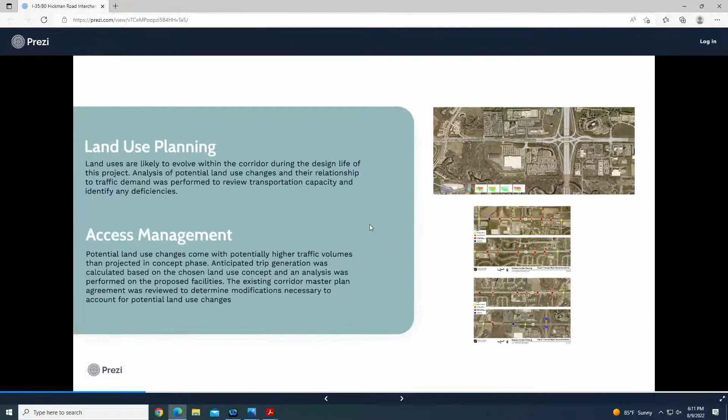Over the past 7 months, we've been working with the City of Urbandale and City of Clive staff on the corridor planning efforts that John mentioned. Those include land use planning, access management, bicycle and pedestrian accommodations, aesthetics, stormwater management, and project cost and funding strategy. I want to talk first about land use planning. Throughout the design life of this interchange, it's likely that land use could change. Early on, it was identified that the majority of the corridor is already fully built out and is not likely to have a wholesale change in land use, with the exception of the southwest quadrant, south of Hickman from 128th to the interstate.

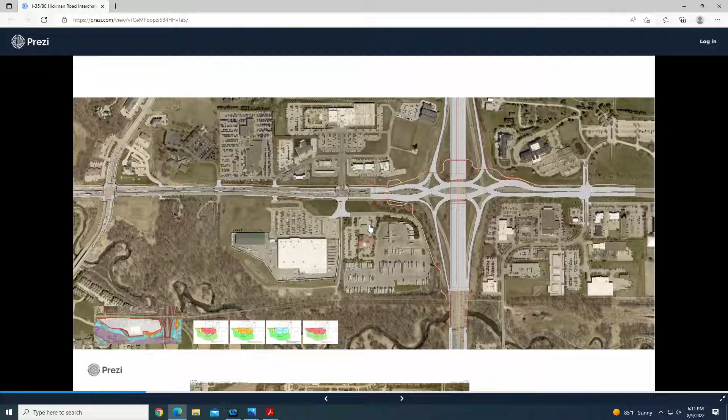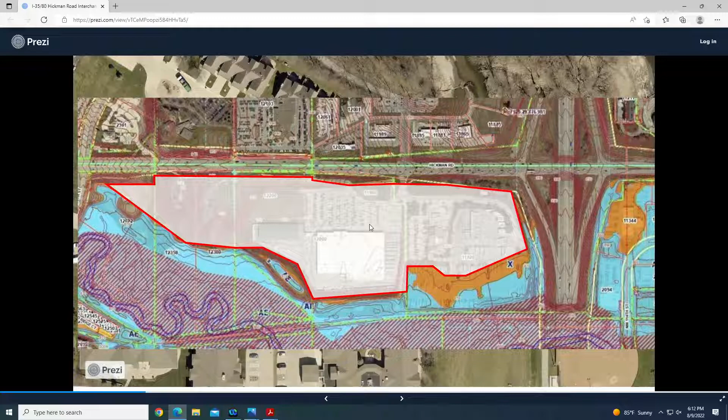If you take into account the floodplain and floodway of Walnut Creek, as well as required setbacks, this area represents 56 acres of developable area.

From that, we developed a handful of scenarios to look at redevelopment ranging from a mix of commercial and residential development.

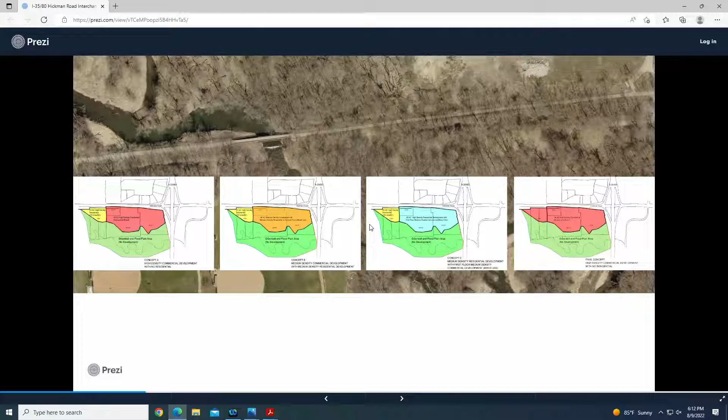Ultimately, the final concept represents the highest and best land use of the land, and that would be the entire 56 acres being redeveloped into a high-density commercial area. In the bottom left, you'll see the assumed mix of businesses that would be in that area.

To give you an idea of the traffic volume changes, currently that area generates about 6,000 vehicles per day. If this area were to redevelop, it would go to a little over 27,000 vehicles per day.

So this planning for land use changes is very important as we develop the interchange. We don't want anything designed at the interchange that would hinder further development in the corridor.

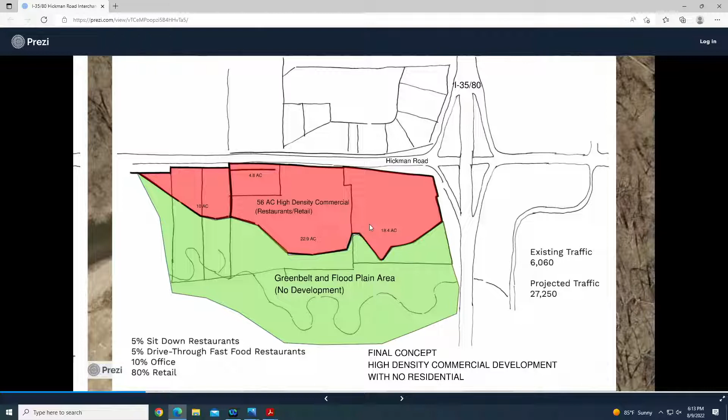City of Clive and Urbandale and the DOT have an agreement in place for access management throughout the corridor, from the interchange over to Alice's Road.

Using the traffic data generated from the potential redevelopment, we focused our efforts on the access management plan from 128th to the interstate. In order to handle the additional traffic that could be generated, the existing restricted access at the Walnut Creek United Methodist Church would need to be changed to a fully signalized intersection.

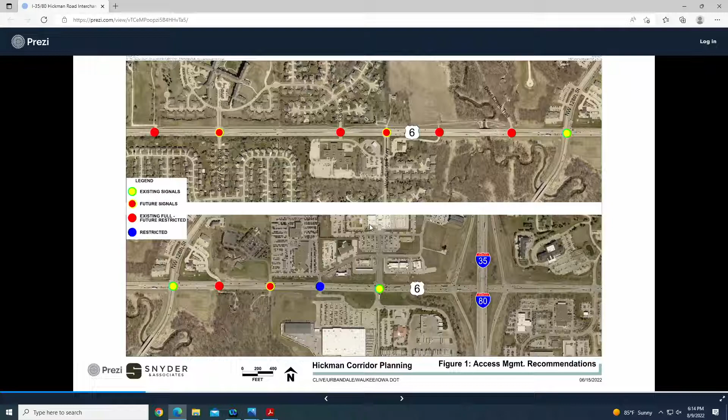These exhibits have been provided to the cities and the DOT to renegotiate and update the access management agreement in accordance with our corridor planning efforts.

Next, I want to talk about the bicycle and pedestrian improvements. Currently, there aren't any on Hickman Road in this corridor, and reconstruction of the interchange does allow us the opportunity to provide those facilities.

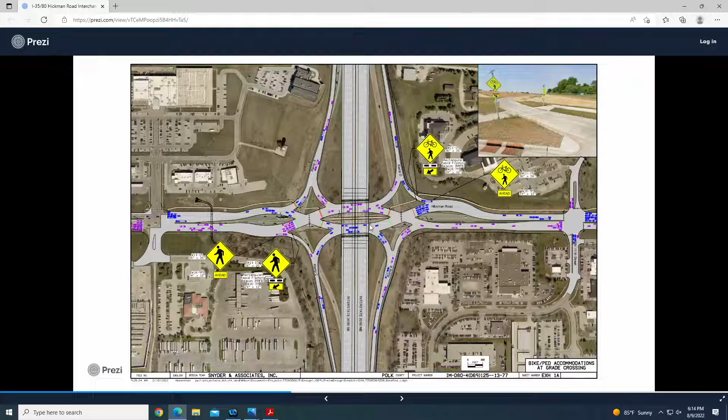A typical pedestrian accommodation would include at-grade facilities, and with a diverging diamond interchange, similar to others that have been built, pedestrians would travel through the interchange, crossing at 4 different at-grade crossings into the center before crossing back out.

Using the at-grade facility as a base, we looked at several different options for a grade-separated facility. The exhibit here shows the final preferred concept, which includes a 10-foot wide trail on the north side of Hickman Road.

Traveling west to east at the Lifetime Fitness entrance, it would be your typical at-grade facility.

As you travel east, the grade raises in elevation to provide a pedestrian bridge over the southbound off-ramp. From there, pedestrians will travel through a pedestrian underpass underneath the interstate, then back up and over a similar pedestrian bridge over the northbound on-ramp. From there, the grade transitions back to an at-grade facility at 111th Street.

On Hickman itself, crossing the road presents a challenge. So we developed a concept that would allow pedestrians to travel underneath Hickman Road, a couple hundred feet east of the Lifetime Fitness entrance. From there, a 10-foot wide trail would make a connection down to the Clive Greenbelt Trail along the southbound on-ramp.

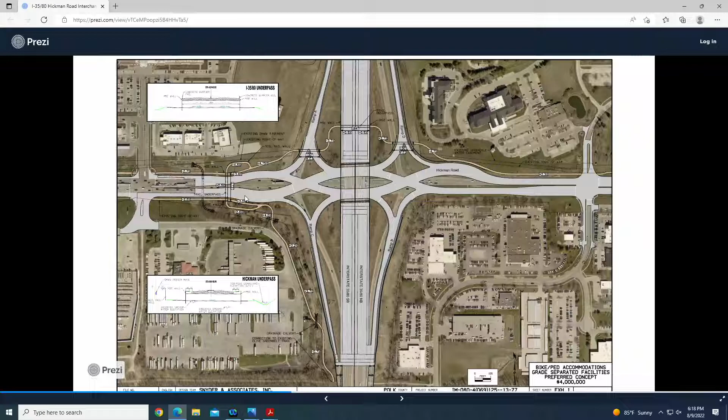With that, I'd like Tim West to come up and talk about the aesthetics and landscaping gateway improvements that are associated with the interchange as well.

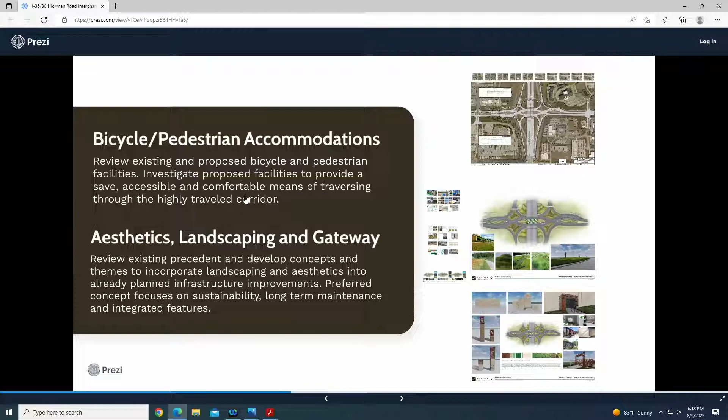Good evening, my name is Tim West with Snyder and Associates. I'm a landscape architect and have been working on this with part of the team on the aesthetics.

This image shows the master plan we ultimately landed on after a lot of committee work and concept work. This is really acting as a transportation gateway to two different communities, Clive and Urbandale. There are some challenges when we try to combine aesthetic themes into one area served by two different communities.

So we looked at different aspects like color, materials, and repeating tones and themes that go through each community, and tried to combine that into some design alternatives.

This image shows a bunch of the background work we did. The top row shows a sampling of different existing themes, colors, and materials that both communities utilize in their existing gateway features.

The middle row shows our study of inspirational images that start to set a tone for how far we want to go with decorative lighting, public art, and things of that nature, and work through those questions with the committee to understand what level of commitment they'd like to make to those enhancements.

We also reviewed past and recent planning documents to understand where the city is focusing their marketing and improvement dollars, so we can make sure we're enhancing the interchange to reflect some of those goals that are part of current planning.

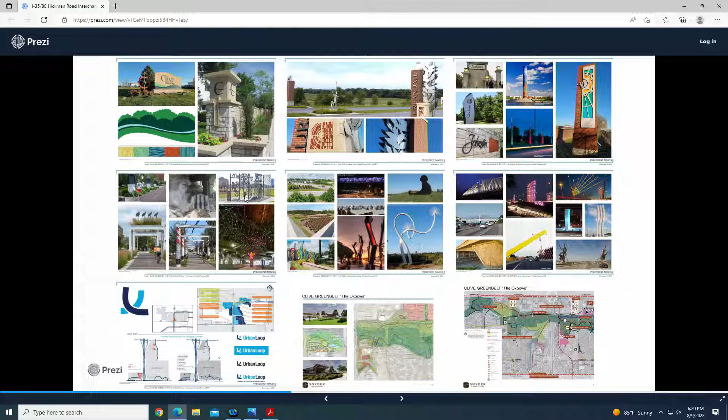The urban loop is another example of a planning document we reviewed to make sure we understand some of those goals as we move forward.

Next, we walked through other potential themes that might be apparent or less apparent that we researched. For example, there might be some cultural or natural themes such as the Monarch Highway, shown on the top right. We researched that a bit to see if it's a theme the committee or communities are interested in.

The Grand Army of the Republic Highway associated with Highway 6 might be another one. We explored a lot of these with the committee and our own team and started to identify potential opportunities for themes, and also looked at opportunities for enhancements as the interchange changes through construction materials.

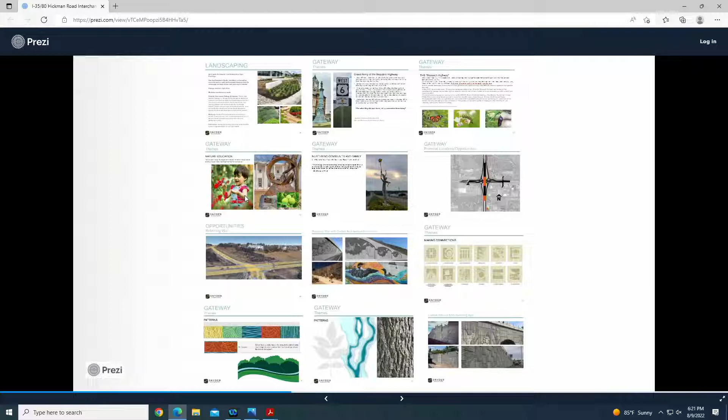Or different types of separations with retaining walls, overpasses, etc. So there's some design work on how we pull different patterns or themes together, maybe utilizing some wall panels as opportunities for theming and aesthetics.

We boiled this down to three different themes. The first focuses more on a creek pathway, which centers on an at-grade crossing through the center medians, and has a curvilinear creek motif to it.

You'll see a couple of photos there of enhanced lighting that would be incorporated into any vertical elements we might have, like decorative columns. This also started to introduce the walnut tree leaflet as a potential design motif, which you'll see later in the final master plan.

The middle concept focused a little more on a ribboning pattern with more monolithic vertical elements in the medians, along with some undulating concrete walls and different separations for visual interest, maybe separating traffic light and headlights.

The last one focused more on celebration of the corridor, with some specialty lighting under the underpass and enhancements for entering and exiting it, transitioning from light to shade to light. It introduced a few more elements with wavy, deep groove textures into some of the MSE walls, all utilizing natural, native plant materials that would be low maintenance and cost effective for the interchange improvements.

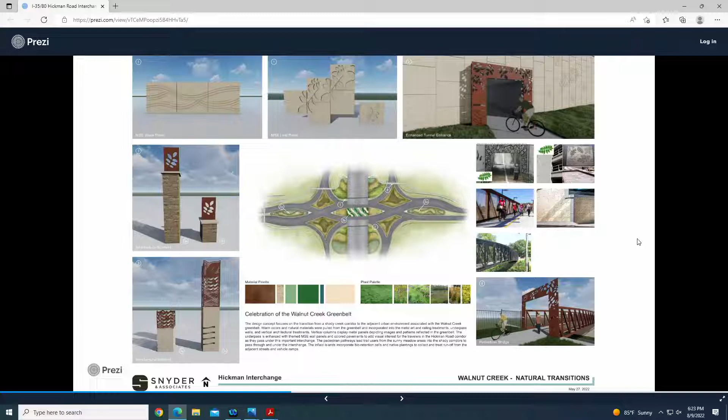You can start to see some of the design motifs on the patterns and colors that we picked that were complementary of both communities. Some of the limestone buff colors of the natural stone, limestone work that both communities have embraced in some of their gateway themes. Also the terracotta or Corten steel patterns, reflective of some of the brick or terracotta improvements or colors incorporated throughout both communities. Those are reflected throughout the enhancement to bring both communities' themes together in maybe a more generic but still

complementary way. And then there's certain details incorporated in certain areas based on the traffic type. For example, as you're going through the underpass, you're going through there pretty quickly, you're wanting to pay attention to everything that's going on. We'd have some bolder, brighter types of enhancements through there.

Some of these larger waving type of grooved enhancements on the MSE panels might be more appropriate under there than something that's more intricate, like the smaller leaflet pattern. So those are more incorporated into the underpass area, which is located through here.

Bold colors associated with the colored concrete on the base underneath there. No plant material can be utilized in there, of course, because there's no exposure to rain or sun. And so there's some vertical lighting elements that are in that area.

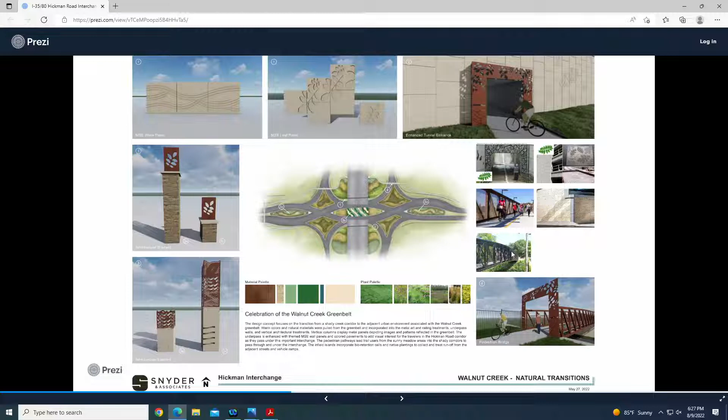One thing I'd like to focus on here for one last discussion is this pedestrian and bike route that comes up and over the ramps. That's kind of a unique situation where you have the ability to put pedestrians and bicyclists up over and higher, and you can view the corridor from a different vantage point than in your car or at eye level.

So there's been some discussion as to whether we would enhance these areas, but we really wanted to focus on the natural transitions and systems. So we took advantage of some of these by creating some detail in the bridge and the entrances to the

bridge, but still maintain some viewpoints that would either be reflective of some of the larger mass plantings of the larger islands and the vertical elements, or the bioretention natural systems associated with the stormwater quality aspects of the project. So there might be an opportunity to provide some education on some of those natural systems as they become developed into the project.

I wanted to keep a short summary here, but if you have any questions, I'd be happy to answer those now or at the end.

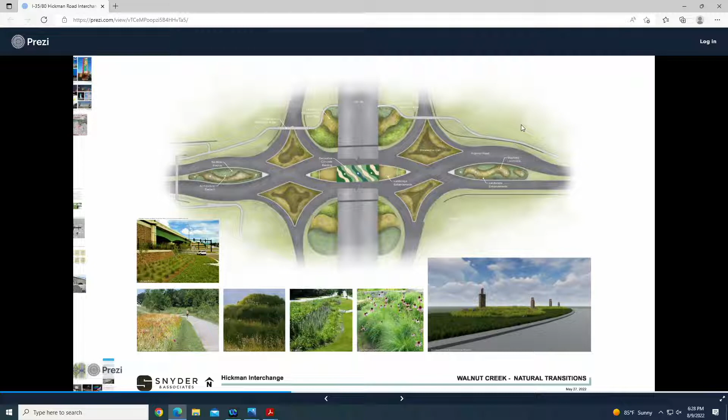Another aspect of the corridor planning efforts involves stormwater management. With the widening of Hickman and the widening of the interstate, there is a lot of additional pavement, which generates a lot of additional runoff.

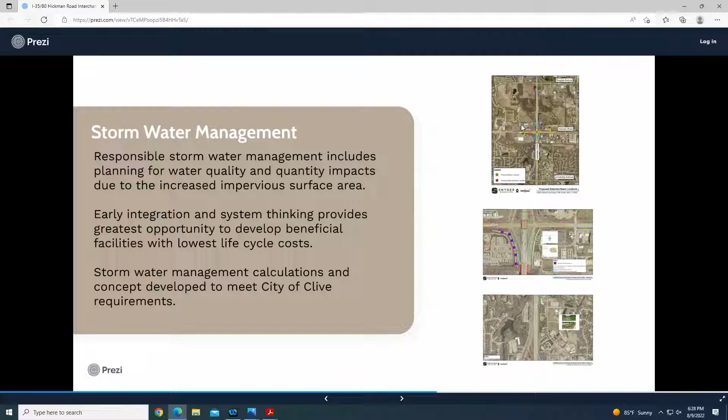Using the City of Clive post-construction stormwater management ordinance, a series of water quantity and water quality improvements have been developed to address those concerns. On the water quantity side, we identified three locations for above surface detention.

That includes an area in the northwest quadrant of the University interchange and two locations at the Douglas Avenue interchange. We tried to incorporate surface detention at the Hickman Road interchange itself, but given the configuration and geometry of those ramps, it's really narrow and doesn't provide the required volumes needed.

Taking advantage of the Douglas and University interchanges, you can see those infields are a lot bigger and allow for more surface storage.

Working with the DOT, they are in the planning process for improvements at the Southwest Mixmaster, which may include reconstruction of the University interchange. Having a detention basin constructed now in that interchange may be problematic for future reconstruction or a major reconfiguration. So we also identified, the red star, an alternative location to provide surface detention.

I should mention that we also looked at underground detention. The cost thereof seemed prohibitive to further develop those options.

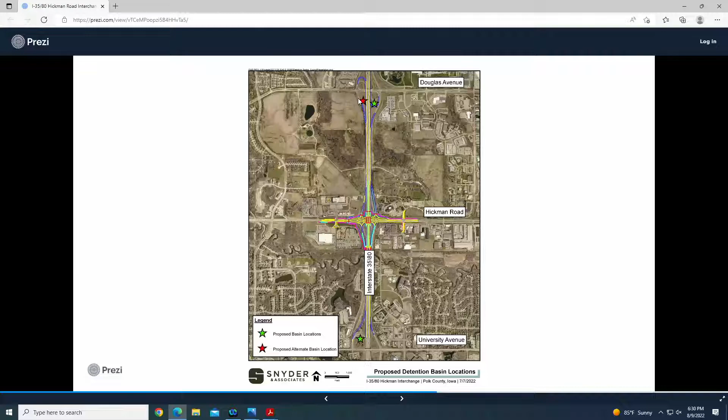Water quality improvements include bioswales within these — we call them splitter islands. The relative size is shown here, but the actual configuration would be configured in harmony with the landscaping improvements.

Along the southern ramps of the interchange are grass swales that have a rock infiltration layer underneath them, allowing the water to infiltrate into the groundwater. The large purple blocks here are existing gabion structures in that ditch. Those will be redone, and they also allow the water to slow down and infiltrate into the ground.

Finally, at the Hickman interchange, there are some improvements with soil quality restoration, where the topsoil is improved to further allow groundwater infiltration and treatment.

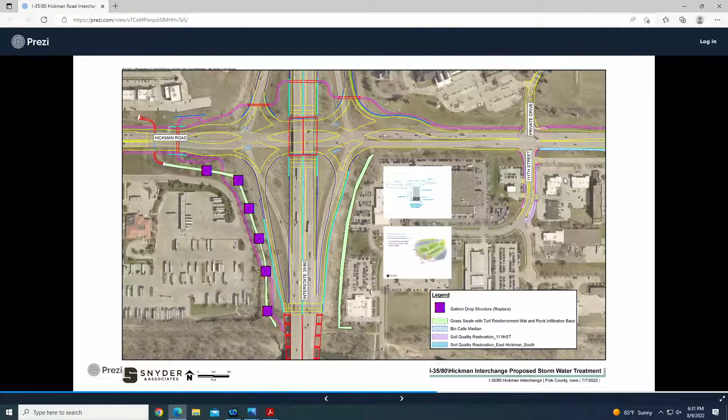This area is further south of the interchange, so the Walnut Creek bridges are just at the top of the exhibit here. These small rectangular shaded areas represent regenerative conveyance, which is a series of pools that allow the water to pool up and be further treated and infiltrated.

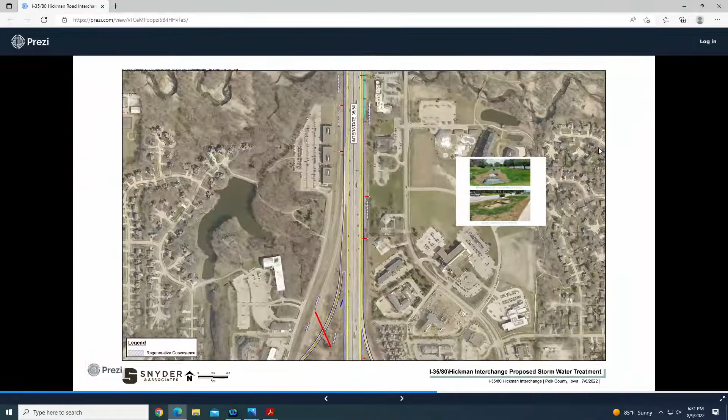Finally, I'd like Wade to come up and discuss project costs associated with the corridor planning efforts, as well as grant opportunities and funding strategy. Thank you, Nate. Wade Greiman with Snyder and Associates.

I serve as the Transportation Business Unit Leader out of our Ankeny office, and I get to help the team figure out where the funding is going to come from, not just from the City of Urbandale or Clive, but from outside sources.

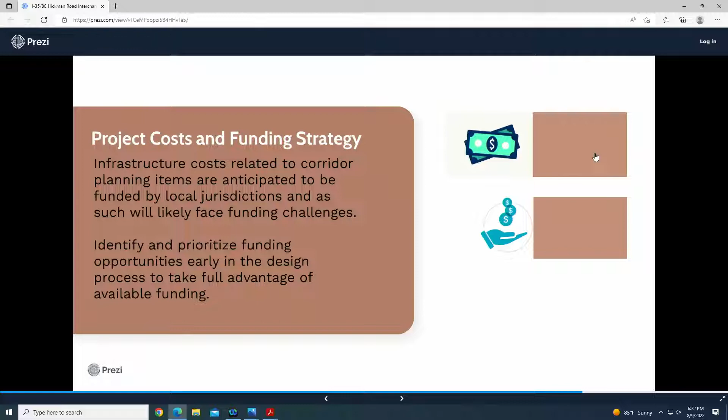We've taken a pretty hard look at the cost opinion. We've refined the design to a point where that cost is coming in at just under $8 million for the improvements we just spoke about on the corridor planning aspects.

$4 million of that is for the pedestrian and bike accommodations, including the two bridges over the ramps and the pedestrian underpass under I-35/80 main line. $3.3 million is allocated for the landscaping and aesthetics package presented here this evening, and almost $700,000 for the stormwater management amenities that Nate just spoke to.

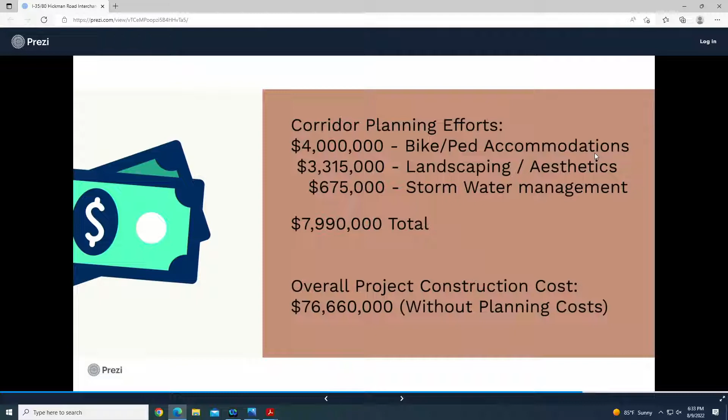When you take a look at the overall snapshot of the project for the mainline improvements, as well as the Hickman interchange improvements and the improvements along Hickman itself, those roadway improvements and structures are just under $77 million as estimated today. So we're talking about a 10% reflection of the overall construction cost for the project to help enhance this area and tie the two communities together with the correlation of amenities.

So there are a number of conventional or traditional funding sources, many of which you'll probably recognize as I go through them. They're administered through IDALS, Iowa DOT, or Des Moines Area MPO.

STBG is actually an allocation to the Des Moines Area MPO every year, and thus far there have been a few applications for funding for this project. $2.5 million has been awarded to the overall infrastructure improvement project for the interchange and mainline.

Other available sources through the Iowa Department of Transportation include ICAAP, which is the Clean Air Attainment Program funds. That focuses on the reduction of emissions from vehicles, translating that to more pedestrian and environmentally friendly transportation modes.

The Traffic Safety Improvement Program, or TSIP, has a maximum award for any intersection improvement of about $500,000. We've taken a look at both of those, and the ICAAP program might be an option for us to pursue as we convert some vehicle trips to pedestrian and bicycle traffic, especially if we have a fairly large contingent of commuters bicycling to and from shopping areas or work.

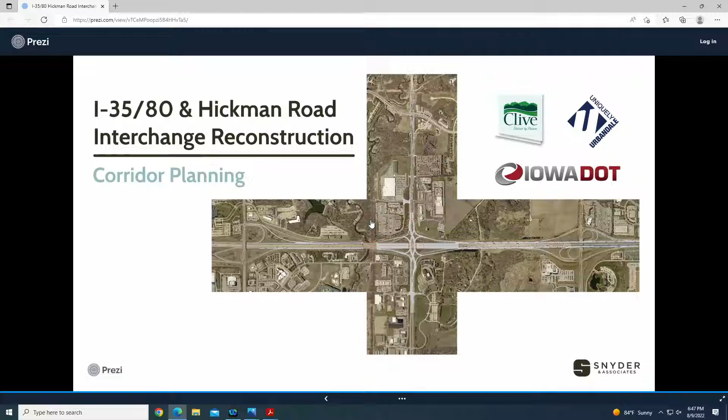Any other questions or comments? Well, thank you for your time tonight. We really appreciate the opportunity to present this very important project, and we look forward to continuing the process. Thank you. Absolutely, thanks for the detail. It's been involved a great deal on the MPO side, so from my standpoint it's a very significant project not only for our city, but for the entire region, so thanks, appreciate it. You're welcome. All right, we will then move on to citizens forum.

This is the opportunity to address the council on something that's not a part of tonight's regular agenda. Would anyone like to address the council at this time? Okay, seeing none, we'll move on.

Item 5 would be to approve the minutes from the July 19 meeting. Hold on, I gotta get my iPad up. Motion by Obrecht, second by McBurney. Discussion. Please vote. Okay, that passes.

And then from the July 26th meeting, I'll move approval. Motion by Carberry Montgomery, second by Kroll. Discussion, please vote. That passes.

And then item 6 is our consent agenda. We have 14 items for approval. So moved. Motion by Kroll, second by Blake. Discussion, please vote.

That passes. Item 7, public hearings, item 7.1 is a public walkway easement vacation public hearing for Lot 9 of Quail Ridge Plat 2 at 3905 Patricia Drive. The public notice for this was published in the July 22, 2022 Des Moines Register. Are there any objections to that notice being published? There were none.

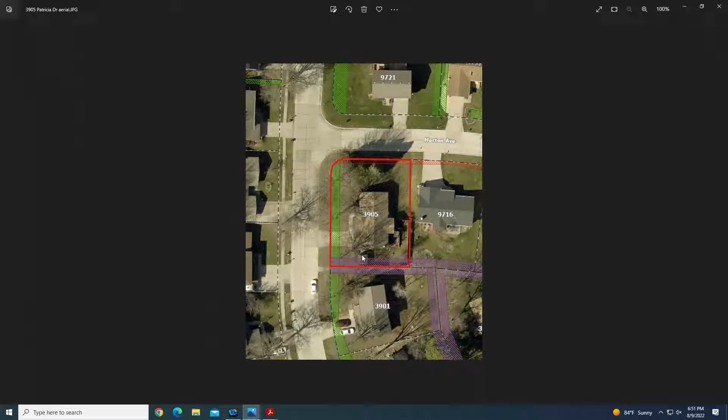Thank you, Steve. Any questions for Steve on this item? Okay, we are in public hearing on this item. Would anyone like to address the council on this? Seeing none, I'll ask for a motion to close the public hearing. Motion by Blake, second by Kroll. Discussion, please vote.

Okay, that passes. There are 2 items for consideration. Motion by McBurney, second by Blake. Discussion, please vote. Okay, that passes. Motion by McBurney, second by Blake. Discussion, please vote.

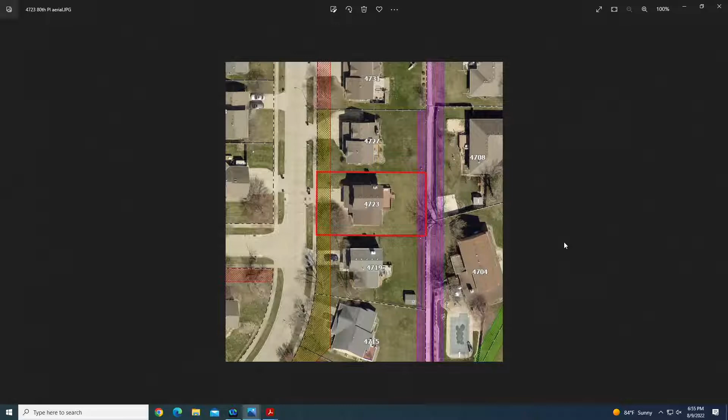All right, we are in public hearing on this item. Would anyone like to address the council on this item? Okay, seeing none, is there a motion to close the public hearing? So moved. Motion by Kroll, second by McBurney. Discussion, please vote. Okay, that passes.

Two items for consideration here. Move to approve resolution 205-2022. Motion by Kroll, second by McBurney. Discussion, please vote. Was that McBurney or Blake? I didn't, okay, just want to make sure.

I was quiet, I'm sorry. I just didn't look up and it sounded similar.

All right, move to approve council letter 7170. Motion by Kroll, second by McBurney. Discussion, please vote. Okay, that passes. All right, thank you.

That moves on to item 8, establish public hearings. Item 8.1 is to establish a public hearing for vacating a portion of a sidewalk easement on Lot 14, Gulfview Estates Plat 3. So moved. Motion by Kroll, second by Blake. Discussion, please vote.

It passes. Item 8.2 is to establish the public hearing for the sanitary sewer right-of-way easement vacation at Lot 1, Urbandale Marketplace 3, Plat 4. So moved. Motion by Kroll, second by Blake. Discussion, please vote.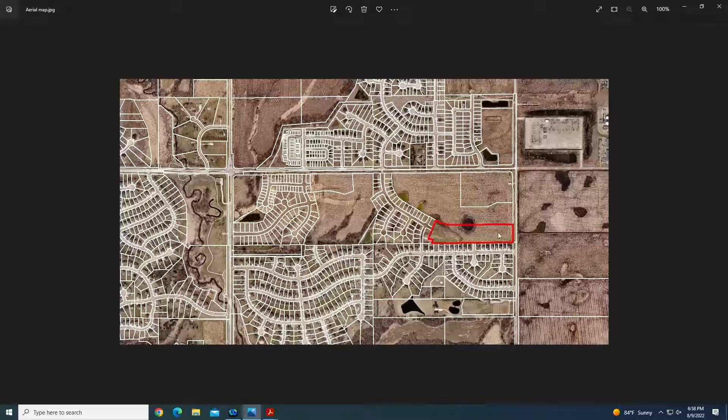Okay, this is the next phase in what was the Roble property. As it develops from west to east, this entire mile from 142nd Street all the way out to 156th Street was sold and turned into a PUD, and development has progressed from the west as we move here to the east. This particular piece is outlined in red, immediately adjacent to 142nd Street. We'll come in with a new street that will connect to the existing street, and let me go back out here to the actual plat itself.

So here is the plat. Here's 142nd Street. North Valley Drive will come in and connect. The lots on the south side of North Valley Drive have a minimum lot width of 75 feet to match the existing lots in the Bent Creek Meadows and Bent Creek Ridge developments. The lots on the north side of North Valley Drive have a 65-foot minimum width as we transition into an area to the north that's going to be a combination of townhomes and maybe some multifamily, transitioning those lot widths.

There are a total of 37 single-family lots that this will create. Planning and Zoning Commission recommends approval, subject to items noted. Would be happy to answer questions.

All right, thank you, Steve. Any questions on this?

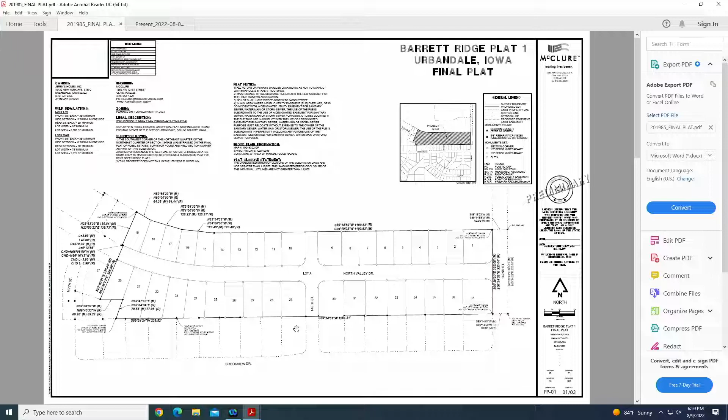Move to approve resolution 201-2022. Motion by Kroll, second by Blake. Discussion, please vote.

Okay, that passes. Item 10, regular agenda items, item 10.1 is consider ordinance number 2022-11, and Chief Johansson will introduce this for us. Chief?

Mayor, members, council, got a couple of ordinances that we did a little work on and updating. To start off with was the Chapter 75 bicycle and recreational vehicles.

The main reason we got into this one was state laws changed as far as recreational vehicles, and they're now allowed to operate on gravel roads in the counties and cannot be restricted like they were before. That posed some questions to us.

We were getting a lot of calls about whether it was now permissible to drive recreational vehicles like golf carts, UTVs, ATVs on city streets. And the changes in the law did not affect our ability to restrict by ordinance in the city.